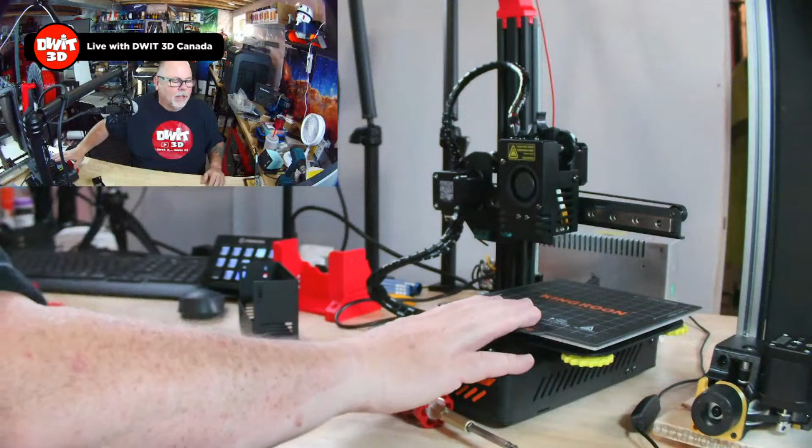That's great to see. Anybody who missed last week, we did a build last week on this guy right here, the Kingroon KP3S that was sent to me. We did a little build on this, and we did a test print of this little Viking guy, which actually turned out pretty decent.

Where's my little close-up camera here? John Cook, hello, welcome. So we did a test print on this guy. It turned out pretty good, actually, very good. I actually sped the print speed up from about 25% to 200% for the rest of it. You can see it sped up a little in quality, but otherwise it's not a bad looking print at all. So it turned out good.

So I just decided to come on tonight and do a little more quote-unquote test printing on this thing. I was just looking for a file to print. I'm looking for a specific one, but I can't find it, so I'll just download and find something.

I had mentioned 3 modifications I do to this printer. And hey, Andrew Osmond, hello, welcome. I mentioned 3 modifications I did to this printer last time I had one, which was the older version, about a year and a half ago.

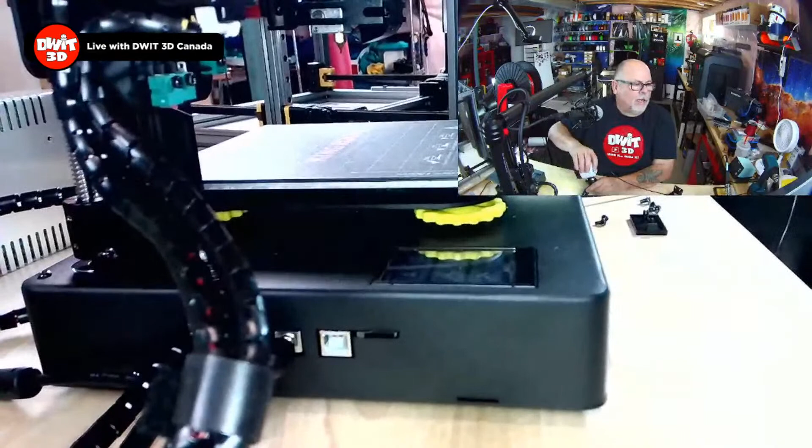One of the modifications was this little piece here that I print mainly for the SD card slot, so that when you push the SD card into the side of the printer, it doesn't inadvertently go in under the frame. But I did notice when I was going to put this on last week, let's turn the light on, get a little bit, there we go. I did notice that they have actually improved this quite a bit.

So if I take that SD card out of the slot, there's really no gap underneath or above. I can be looking up at the camera here and blindly go ahead and put that SD card in without it falling in. So that kind of made this little modification null and void. I don't need that. It would have looked kind of cute with the red highlights and everything, but I don't need it. So they've obviously fixed that and addressed that issue, unless I just fluked out and got a machine that happened to have one in place. But if there's ever one out there, there's this little modification you can use.

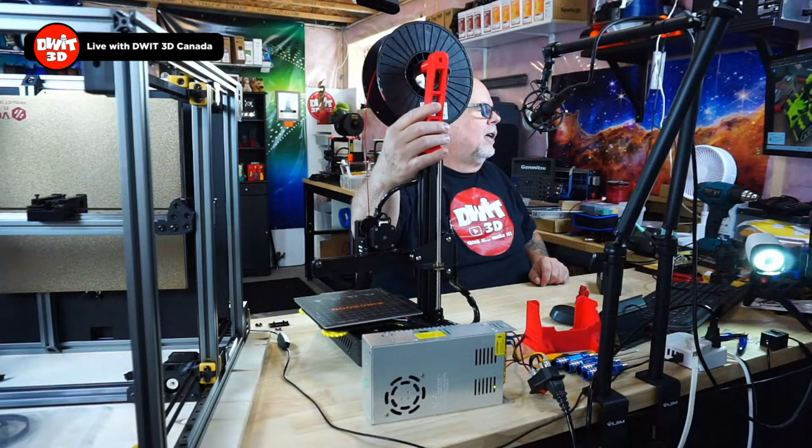The other modification I did was—if I switch to this camera, you can see from behind—I made a spool holder that basically pops on. I didn't quite clean it up enough for it to pop on, but it basically pops onto the top of that rail. It's going to be fine.

I must have hit a button, I think I'm homing. I hit the little screen and I'm homing the printer. No big deal. But yeah, the spool holder here—basically what it came with was two little wheels that you'd put there and roll your spool around, and it was just not my favorite thing. So it's a modification I found on Thingiverse.

The description's below in the video, in my previous video from last week, on where to get this. Let me just go back—I did an auto level thing here, let's just home everything and get that back to where it was. So that's the second modification, which I really like, because it gets the spool up out of the way, if you have the height. Okay, so I don't know why it's leaning on me.

I put supports in here, and I think I just didn't quite clean out some of the supports on there. Not a big deal.

As you saw in that last image, the power supply is in pieces here because I took it apart. The third modification was a power supply holder, and yes, it's broken on the front. I put the power supply in, and when I went to attach it, realized the screw holes did not line up. Whether they've changed this piece of the power supply a little bit or not, I don't know. Anyway, the screw holes didn't line up, and it was such a tight fit in there I actually had to snap it open, break the plastic to get it out. I'm going to remodel this.

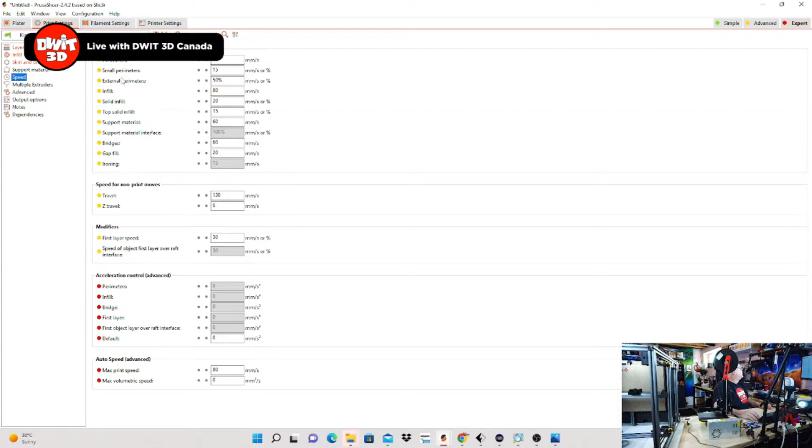That's fair enough, and I'm going to go to filament settings. We're going to go to 210 for Jesse PLA, 60 for the bed is fine, cooling is fine. Boom, boom, boom, yeah, we're good here.

Okay, just something quick to slice up here, should be an hour-long print, if that. 1 hour, 30 minutes, it'll give us time to look. It's not a speed benchy, that's for sure.

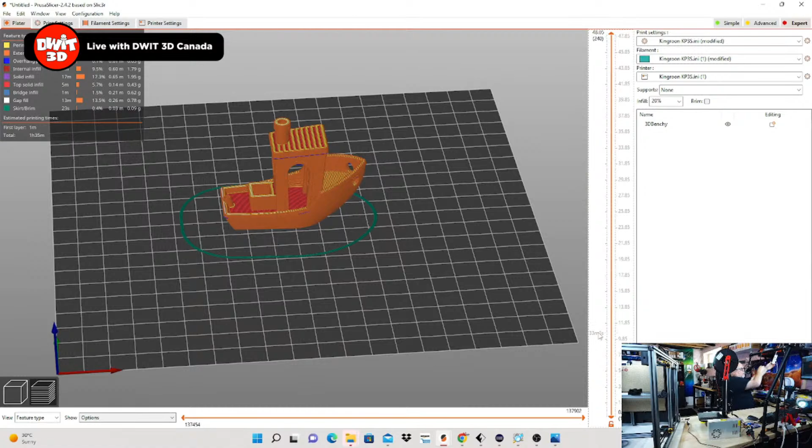Okay, let me grab the SD card out of here. And where's my micro SD? Right here, way up over here. Oh, I'll switch cameras, you guys don't want to stare at that the whole time. Micro SD port is right there.

Yeah, I know, I don't want to read you. Boom, and let's just save it to that. 3D benchy, save, and eject. There we go, okay, start this print up.

See how this does, and then I will maybe quickly model that base for the power supply.

Okay, let's go back. I haven't touched the level since last week, so everything should still be fine. The Z offset should be fine.

We're going to go printing and... not there. Benchy and confirm. Well, let's see how well this profile was made.

So we're going to do some heating up, and we'll get going. So I've got a new... where'd it go? I'm going to pop this camera off of this guy. This will be the camera we can watch that benchy print with.

And I picked myself up a new little mount here. I'm hoping it's going to make this a little better camera because it'll make it a little more versatile for where I can put it. This is a great little close-up camera, it's that document camera you see a lot of us using, but it had a terrible stand.

Let's just see, close-up cam. Oh yeah, I like that because then I can move that pretty much anywhere I want. Can I go lower? Oh, I can go down like that. Oh, this is nice. What a nice little combination this thing makes. There we go.

I like this printer, Ben. I had one that I'd since given to a friend, but I had one about 1.5 years ago, one of the first versions, and I had updated to this new hot end, the Titan style extruder, and I quite like it. This little printer does great prints.

It's $169 US for this printer, and for the price, it doesn't do bad at all. There's a higher end model where it has the power supply built in versus having a separate standalone power supply, but no, I like it, this is a great little printer. I think anybody wanting to get into the hobby, who has a couple hundred dollars to spend and isn't sure they're going to like it, should get a printer like this.

You can also get the Creality Ender 2 Pro for $10 less, but it doesn't have nearly the features that this does. Considering this one is $170 US, you have linear rails on the X and Y, direct drive Titan clone extruder - not bad - a touchscreen display. It's a small touchscreen display, but it's good. Silent stepper drivers, etc.

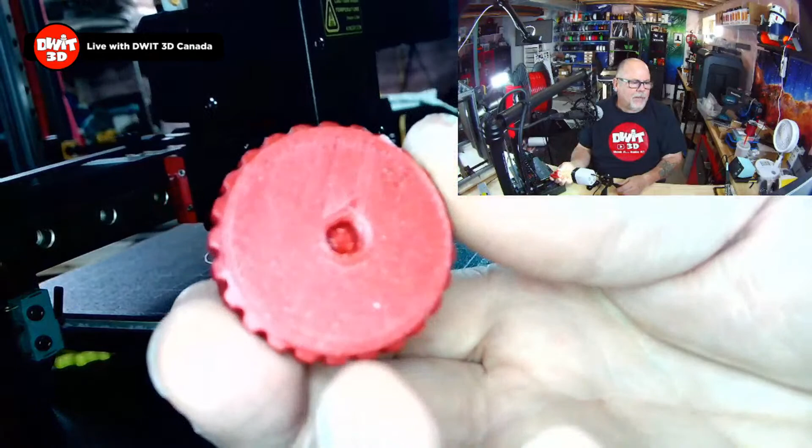So, can you install an ABL sensor onto it? I haven't looked at the board, but I think you can, though I honestly don't think you need to. It's a 180 by 180 bed. You could, I think you could, but don't quote me. I'd have to check the board first.

But I was asked the question: am I going to put an ABL or something like that on my Voron 0.1s? I said no. They're 120 millimeter by 120 millimeter bed. I don't need to.

But this one here, my experience so far has been once I level it, it's staying pretty level. I would encourage stronger springs for the leveling knobs. These aren't too bad, but that's one thing I do for all my other printers, making sure I have those strong yellow springs for the leveling knobs so they stay level. But so far with this one, I haven't had a problem.

This will be my third or fourth print on this, and I have not changed the level on the bed. The other prints were just a few quick things I did for some friends, and they're gone, but they printed well. I kept the test print from last week, and I'm going to also print.

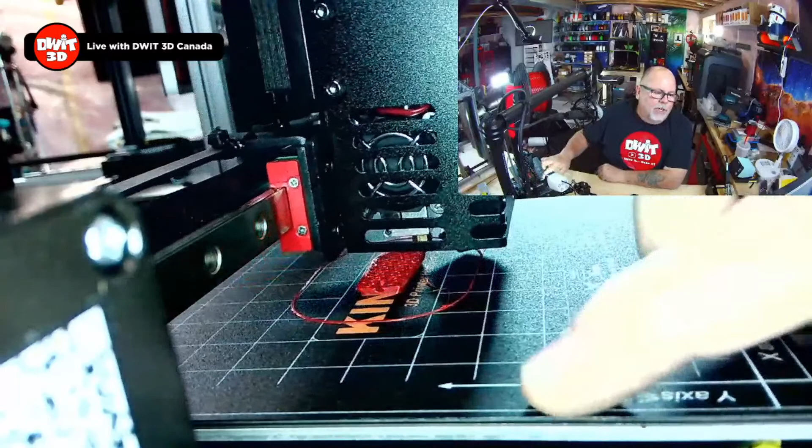But when I first got into 3D printing, and I had my Creality CR-20 Pro, it had this cheapo type flexible magnet bed on it. I didn't know what I was doing, and I jammed the nozzle into it, and it was done. These are not nearly as forgiving as a steel flex plate.

Did you feed Waylon? Oh, not yet, but I will. Okay. So... oops. Oh, I think she's listening to my stream as well. She watched me answer.

So, the other thing I'm going to fix on this printer. Paul, what I'll do is let me show you real quick. Let me get over to the other window here. The weather, we are in a heat wave here. It is hot here today. We are in a major heat wave.

Kingroon.com, you have one also. You made the spool holder, which is a must. Yes, exactly. The spool holder supplied - and I'm sorry if you're listening Kingroon, or if you watch this - it's crap. In a pinch it works, if you've got nothing better it works. But if you don't have them quite lined up straight, I've had the spool fall off it a couple times.

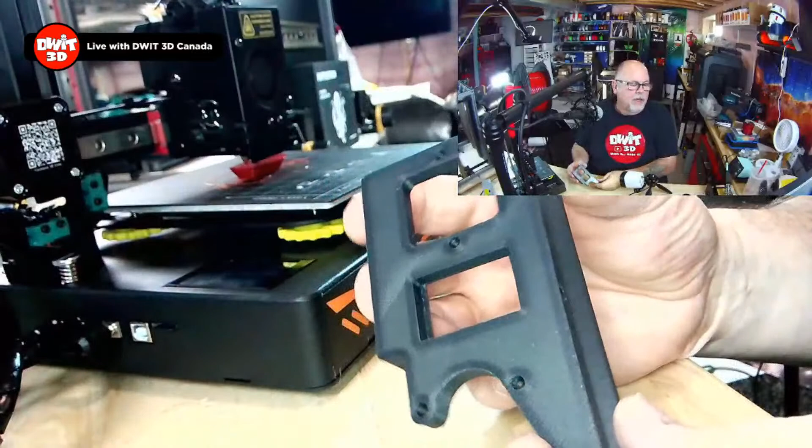This is beautiful filament. Let me just steal this camera for a minute. This is the part for the power outlet, printed in PLA carbon fiber. It's a little bit too light - I wonder if I need that light on, because yeah, there we go, that's a little better. And this was run using the new Prusa Slicer, the Alpha Prusa Slicer - 1.5, 2.5, whatever it is, the new Alpha one with that new algorithm.

That's the inside finish of the print. There's the side body for this print - I mean, that is beautiful. And this is, as I say, PLA carbon fiber from Matter 3D. If you look there, beautiful print. And then there's the bottom layer that was on the bed. This was printed on the Fokoos Odin-5, and strong - I mean, for carbon fiber, very strong.

And let's focus this again. Yeah, and this prints at a much higher temperature than standard PLA. So anyways, just wanted to show you that.

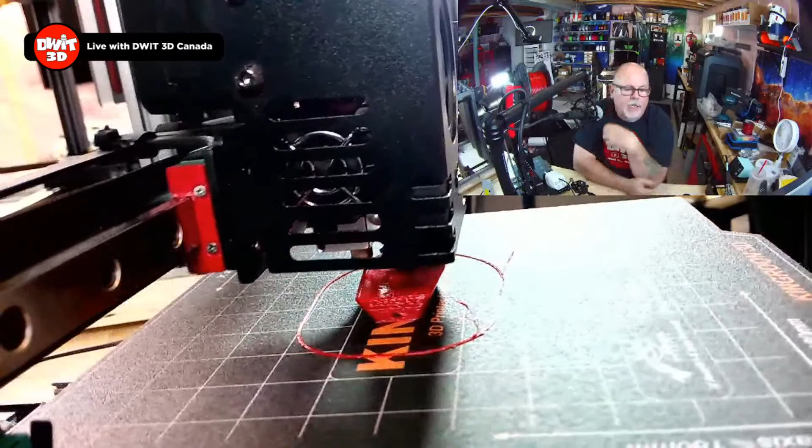When you started the benchy to print and it started to get up to temperature, were the fans very noisy until it laid down plastic? Not really, Bernie, no, not really at all, like right now.

The part cooling fan, which I'm assuming is this one, is not even running right now. And the hot end fan in here is very - let's see, that's running. Or is this a hot end fan? Why is that not running? Oh no, that's the part cooling fan, sorry, the hot end fan's inside here. Yeah, but no, not at all - there was really no negligible difference in the sound.

Yeah, that is my hot end fan right here. But my part cooling fan isn't running, which is interesting because, mind you, I didn't take that close a look at that profile that I sliced this with.

So let's see what they've got set just for fun for the fan settings on this thing - cooling. Oh, minimum 35, maximum 100. Okay, well, they got the cooling down to 35 at the minimum. Enable fan if layer print time is below 10, slow down layer print time below 5. Yeah, it's going to be variable. It's fine, it's going to work fine.

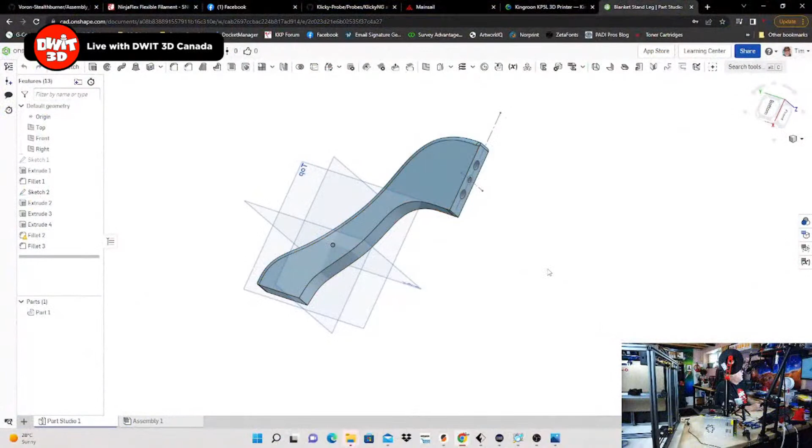It was so easy. I like their file structure in Onshape, and I like the way their tools work. There's a few things I prefer over Fusion 360. I was able to model and get my dowel holes and the screw hole that screws right through the back. Once my rat rig's up and running again, I'm going to print 4 of these legs. They won't match the wood exactly, but I can always paint them, or do them in black filament, not wood filament. I think they'll still look good because all 4 legs will match.

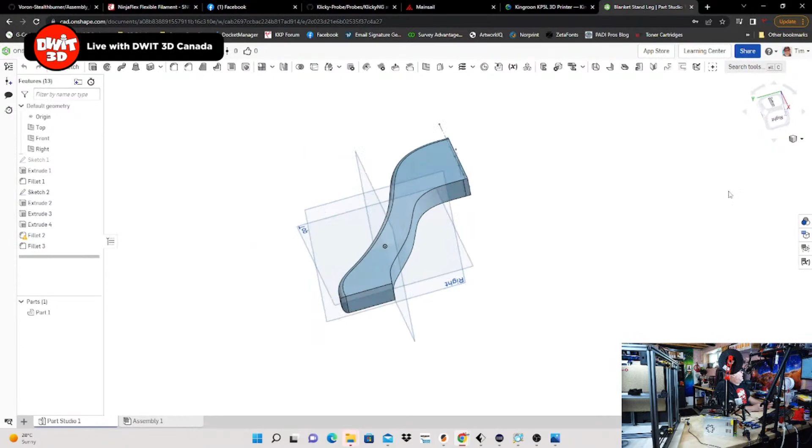I love this modeling software. It's great, very similar feel to Fusion 360. You have your timeline over here, your features, windows. It's a little different down below as far as the file structure works. You have an assembly, so if you have a whole bunch of different parts, you can bring it together in one assembly tab, et cetera. Anyways, I just thought it's great modeling software.

And it's free, you just got to sign up. It's a free account for makers, and just don't model anything you want to keep secret or don't want anybody else to have access to.

The plus about that though, is I can go on and say I wanted to model something myself, I'll go look and say okay, power supply holder, somebody might have made one similar or a different idea, and I can take that model and bring it into my Onshape, and alter it the way I need it. So that's a plus, because it's sort of a community-oriented thing. Or if there's something I'm looking for, I can look and see if it's there, and why reinvent the wheel if somebody else has done it.

Can you import a design? Good question.

Let's just see what we have here. It's all cloud-based too, just so you know. So if I go back, I'm new to this software, just so you know. I can go here, go create, import files. So if I say import from connected service or import files, it'll import any kind of file. It just says all files.

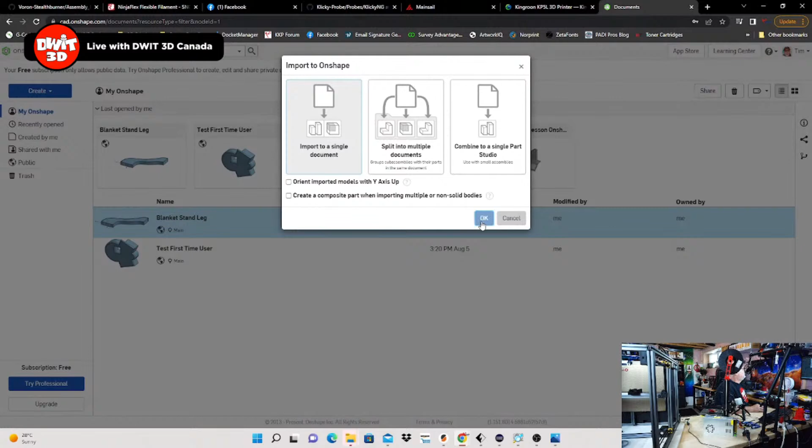Let's see if I have an STL, let's see what it does with STLs. Let's go to my desktop, I'll show you what I'm doing here. Do I have an STL? 3D Benchy, let's import a Benchy just for fun. Open, see what it does. Import to single document, split into multiple documents, combine into a single part studio. I don't know, let's use the default. And it's importing, and it imported the Benchy.

If I open it, 3MF. I don't know, what do I update? No, download, no. I don't know what it did. I don't know what I'm doing here, I really don't. Cancel, let's go back to my main window. I don't know what that did, but I downloaded something obviously. Can I delete it? Send to trash. Let's try again, let's go import, let's see if I can import a vector.

Astro Printer's logo, just for fun. Nope, so I guess it's limited as to what it can do as far as importing, but let's send that to trash. And those are some other models I've opened to look at, a couple from Teaching Tech. Oh, I did just answer it? Good, okay.

Yeah, I'm sure you can, again I don't know enough about it, I don't really do many imports. I just did this, this is nothing, I was just doing a test just to see how this all worked. Anyways, it's pretty decent software in my opinion, but as I say, the big thing to watch out for is that it is public domain, all your files. But stuff like this blanket stand leg I'm making and other little things I've created doesn't matter to me. People can take them.

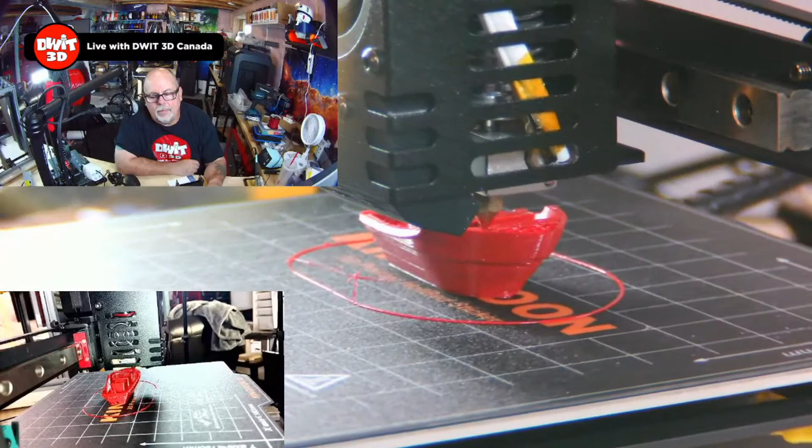Change, sorry for all the comments, but the most important part in 3D Rocks lithophane software is to change settings to negative or positive, as default is wrong. Change to opposite, that's right. Yeah, you want to have a negative image so that when you're looking at it, it looks like crap, so that when the light comes through it, the light is going to light up the dark and darken up the light. Yeah, that's one thing I do know about lithophanes, is you want to start with a negative, and then when the light hits it, it becomes a positive.

I must be printing the rubber bumper version of the benchy. I don't know what happened to the front there. I'm going to let it finish and I'm going to check it out and see. But the back looks fine, if you look at the back, looks fine. I don't know what happened to that front. There's an actual, let's see if I can, yeah, there's an actual bump there.

A bump out, so, yeah, I didn't create the profile for Prusa Slicer for this. I just downloaded the profile, imported the STL, set my temperatures and all that, and said print. So I don't know what's going on with the profile. What I really should do, to be fair to these guys, is I should load the Cura profile that came on the card with this printer and use that, and see. Let me, actually, I can't pop the card out right now, it's printing. We'll just let it finish. What the heck.

I'm going to create a document. I'm going to call this document KP5L.

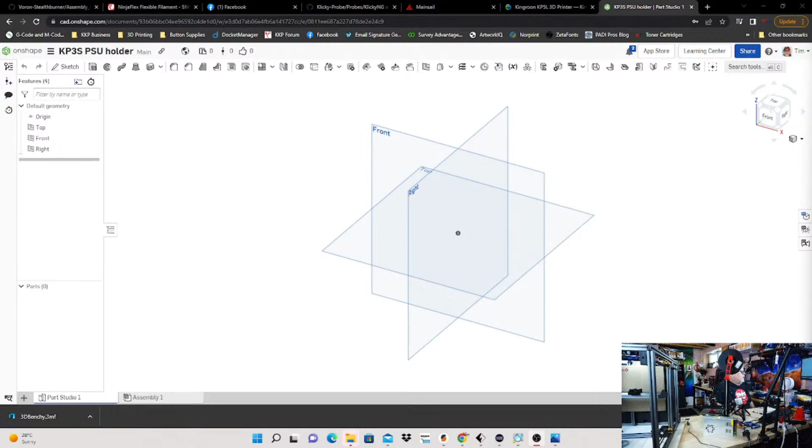If I were to go to the Onshape window, let me get rid of that... and that's the wrong camera in there anyways. So if I go like this, get rid of that, and then if I bring in this - no, wrong one, stop. Wrong video capture device. I want to bring in this one. No. It's like I don't know what I'm doing here, but I really honestly I do know what I'm doing, for the most part. I just don't remember which camera I have hooked up.

There we go, that one. Look at that bump in the Benchy. I can bring that in there, just like that. You can keep an eye on the Benchy too.

So I'm going to create a sketch. I'll do it on the top front, doesn't matter what surface I do it on. I'm going to hit N to bring that flat. The only thing I haven't been able to do in Onshape, I have to figure out if I can, is get my logo in the bottom corner. I can do that.

And in Onshape I can't use my space mouse. I haven't figured out how to use my space mouse, which I do use in Fusion 360.

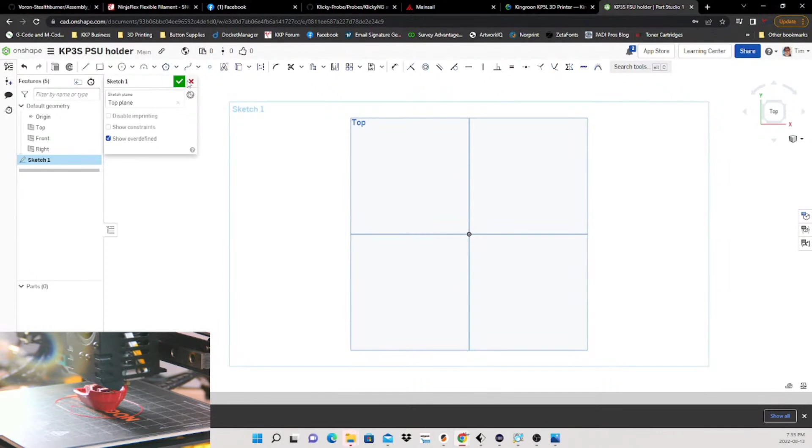Show over. Okay, there's my sketch. Oops, I don't want sketch 2, I want sketch 1, I hit the wrong one. I'm still getting used to this. I want a box, doesn't matter where. I want this to be.

Oops, get out of there. I want to dimension this box. I want this to be 90 - what did I say, 118. The other thing I like about this is that, no - 118. Oh, see, I'm frozen. There we are.

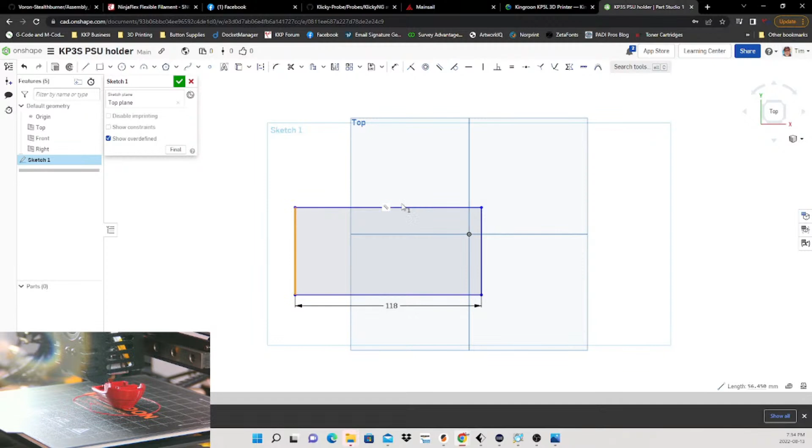With dimensioning, all I need to do is pick one side, I don't need to pick the other side as well. Or do I? Come on, it's lying to me. Stop whatever you're doing. Dimension - there we go, I want this. That's what I wanted. What was all that other crap? 52.

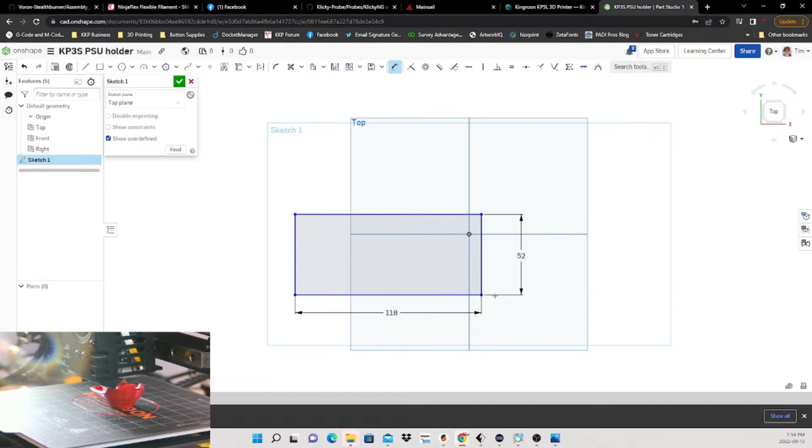There we go, there's the base, there's the bottom. And we're going to extrude that to be how tall? 82. 82 millimeters tall. So we want to extrude it. Let's get a better view here. We want it to be 82 millimeters.

That's good. Now, 82 millimeters is cool, but I don't want it to be solid, so I want to shell it. And how thick do I want my walls? I got to remember, I got to keep in mind this is going inside it, so I want my walls - I don't need them as thick as they are now.

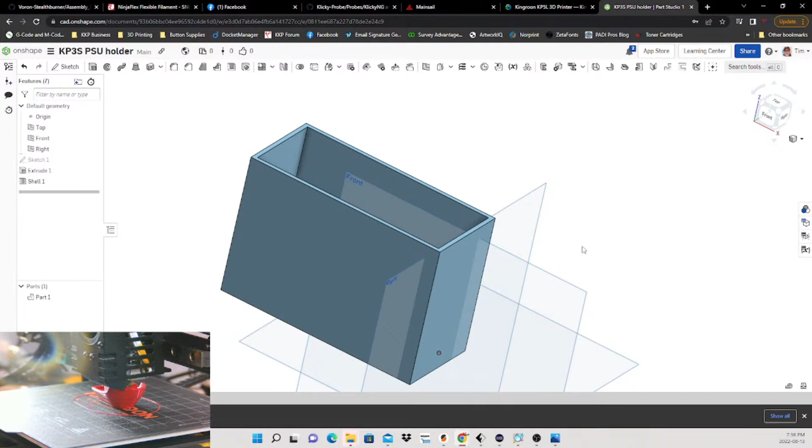So I'm going to measure the opening. I need a box that is... no, wait, let me think. I'm not designing this, I'm designing a case that this goes in. So I'm thinking, there we go, so I want this to be...

I need to do a cutout at 40 millimeters, 42 millimeters high. It doesn't have to be that big. It can be 42 millimeters high and 70 millimeters open.

42 by 70, I think I said. 42 up, and then we're going to go 70 wide. Anybody who's familiar with modeling software, I'm driving you nuts right now. I know I am. So we're going to sketch on this surface.

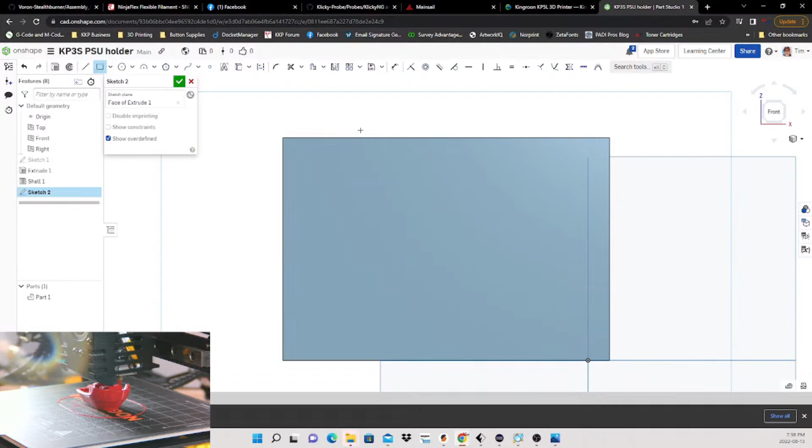Bring it to the front, and we're going to just create a box again. Although I want rounded corners, I'll figure that out after. But I want to just create a box 72 millimeters wide. So we're going to dimension that.

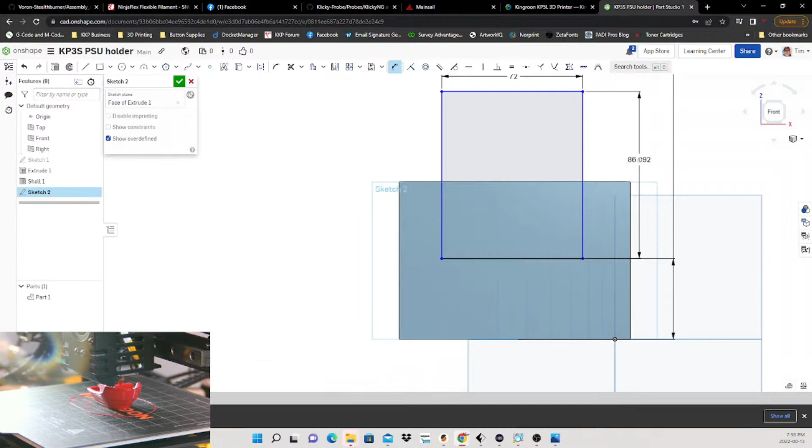72. And height-wise, I know I want the distance between there and there to be 42 millimeters. Then I just needed to cut the top of the box, so I don't really need that to be that tall. How tall is that going to be? About, let's see, probably 38 millimeters. 38 millimeters sounds good.

I want it to be right to the top. 39, 40. That works.

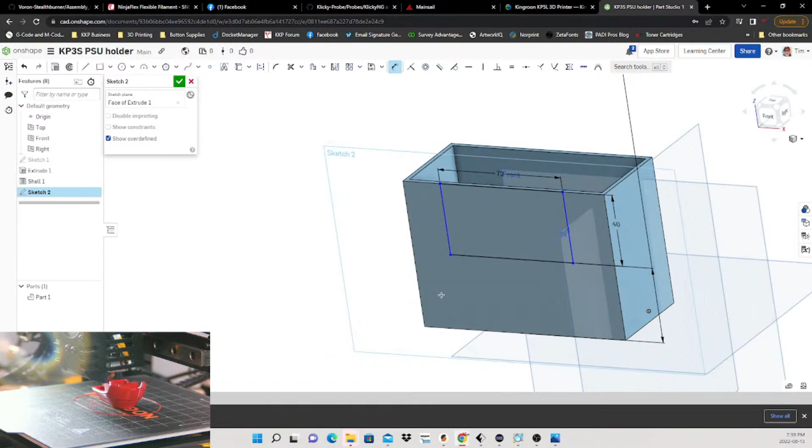I want to round that corner, and that's what I'm not sure about. I'm still fairly new to this stuff. So I want to round, but can I actually put a sketch fillet? Sketch a fillet? Really? Oh, look at that, that's cool. So if I do a radius of, let's do a radius of 11, then I can sketch a fillet over here. Radius of 11. Look at that, that's cool.

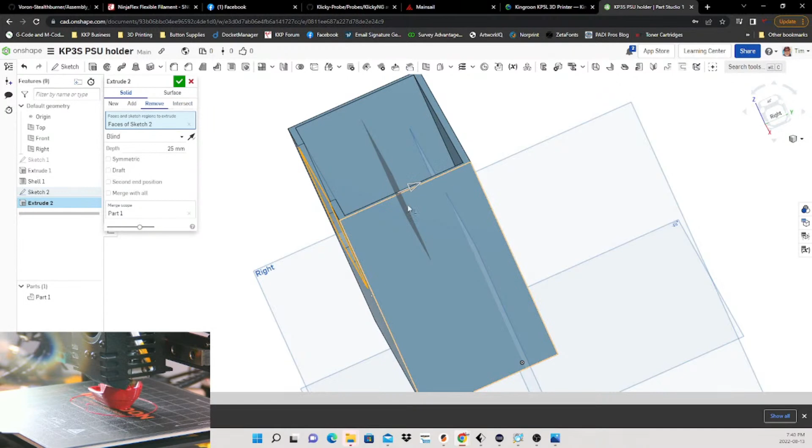Let's bring up this sketch. Let's extrude it, and we want to cut, so we want to remove, and we want to just remove to that surface. I don't know quite how to tell it to go just to that surface in this yet. If I go okay, there we go. So there, I got that cutout I need. That's perfect so far.

So that gives me that side, which is great, that's all I need for that side. I may just do a little— I've still got to put this base feet and everything in yet. So then if we go to the back side, I need my base to be a little thicker.

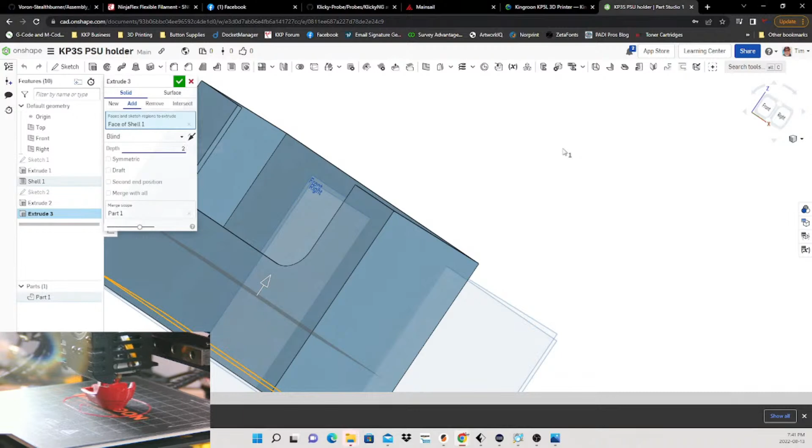Can I just extrude that one piece? I want that to be 4 millimeters. So if I extrude, yes, I can extrude just that piece. I want to add, but I only want to extrude that by another 2 millimeters, and that should make the base a total of 4 millimeters thick. Good, okay.

I really wish I could use my space mouse.

Okay, now for the back side, I want this opening to be—because this is where I've got to run that cable out through—oh look, Benchy's still got a little ways to go on the Benchy. So I want that to be 80, and we're going to come right up to the top, and we're going to come sort of a little circle-ish down, blah, blah, blah. Yeah, something like that. So 80 by...

Okay, let's see what I can do here. Sketch on this surface this time. Okay, I'm going to create a box here, we're going to make it... we're going to dimension that, and that's going to be 80. And I want the width to be—oh no, it was the width, yeah, 80 is right.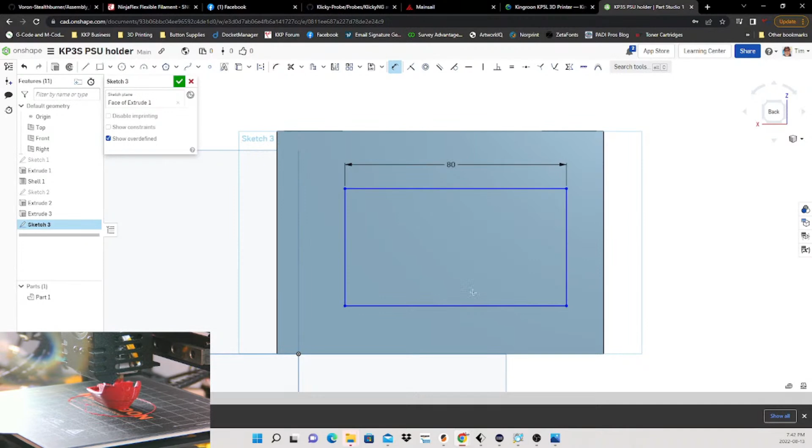I want this to be—where's my, you know what I really need here? No, I don't. I want the distance between here and here to be 4 millimeters, because that's how thick my base is, and I want that to hit my base. And I want, actually, what did I do on the other side? Did I center that somehow? No, I don't think I centered that. I think I made a mistake there. Okay, that's all right, I can go back and fix that.

Parallel—no, don't want parallel. I want coincident—no, I don't. Anyways, so if that's 80, how big is this here? Dimension cannot be created between these two items.

Allow for slight shrinking on walls. Yeah, I'm not used to doing these things live, so I'm kind of just sort of kerfuffling my way around. I don't remember how tall I made that thing. Oh, I tell you, how tall I made it at 52—okay, that's the base, the height. I extruded it, how tall did I extrude that thing to?

In Fusion 360, I can go back and check all these things. This one, I'm just not 100% sure how to go back and check how tall I extruded things to, but I can always actually just check— 118, 80. I'm getting there.

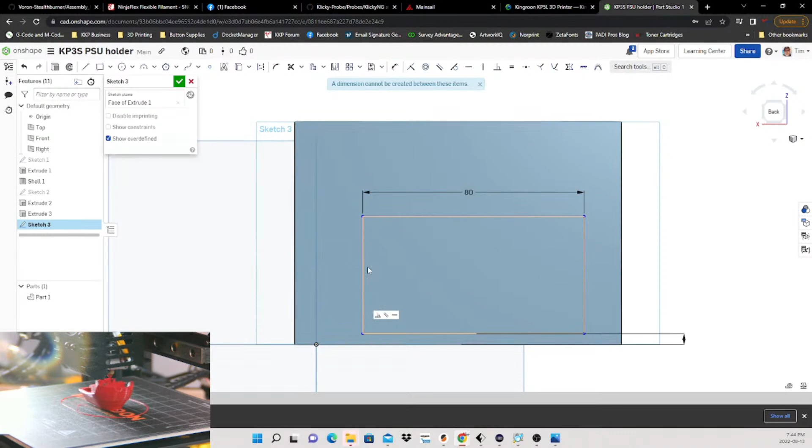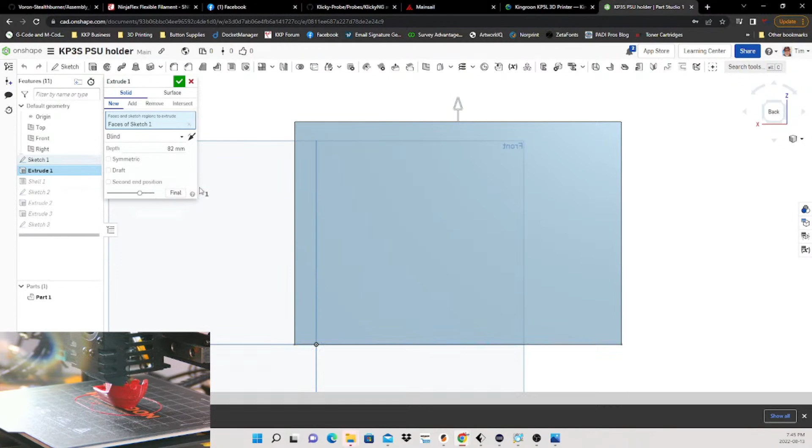Yeah, perfect. So that's what I forgot to do on the other side. And I believe if I go to my second extrude, no, that's not the one I want. It's this first one, 82 millimeters. I want to go 78. Okay, so let's get out of that.

Back into my drawing, and this one I want to extrude, or I want the height, sorry. I want this to be 78. If I'm right, yeah, that works out. 78, okay, perfect.

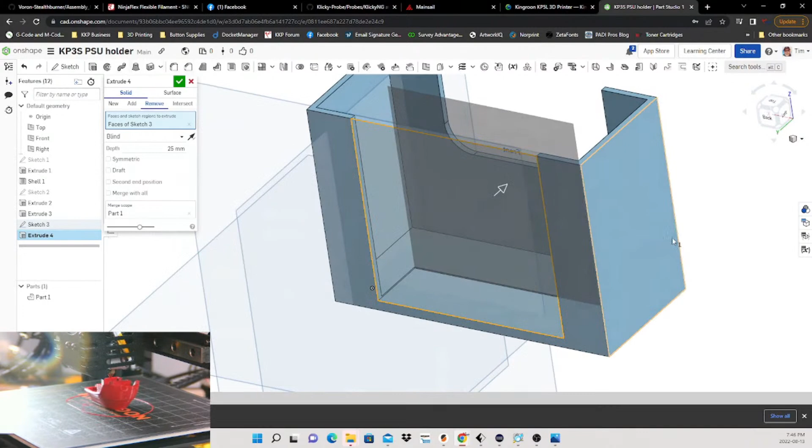Now I want to extrude that, and I want to remove, and I want to go, okay. There we are. Okay, so that's kind of what I wanted for the front. Oh, a little bit too close to the bottom. Not a big deal, I can fix that. But see, I kind of got the basic shape now of what I'm trying to do here.

That's funny that it's that close to the bottom. It looks like about 1 millimeter off. Where's that sketch? Sketch 3. It should be maybe. Where was that dimension? Right there.

Maybe that should be 5 millimeter. That should be 77. Is that right? Let's see. Is there a little lip there? No, I think that's right.

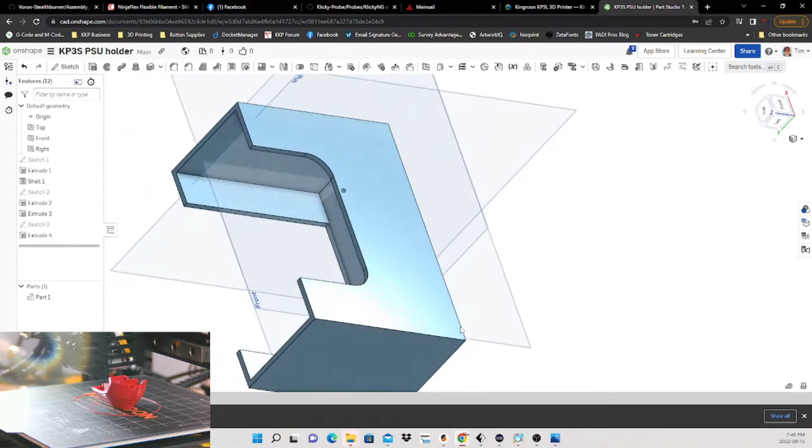I need to figure out how to do like a cross section. Oh, there is a bit of a lip there, but that's okay, because I've got to put a little bit of a zoomer thingy there. It is all part of the learning process. Like, I don't know why there's a bit of a lip there. If I have a 4 millimeter base and I put it up 4 millimeters from the bottom, but that's okay.

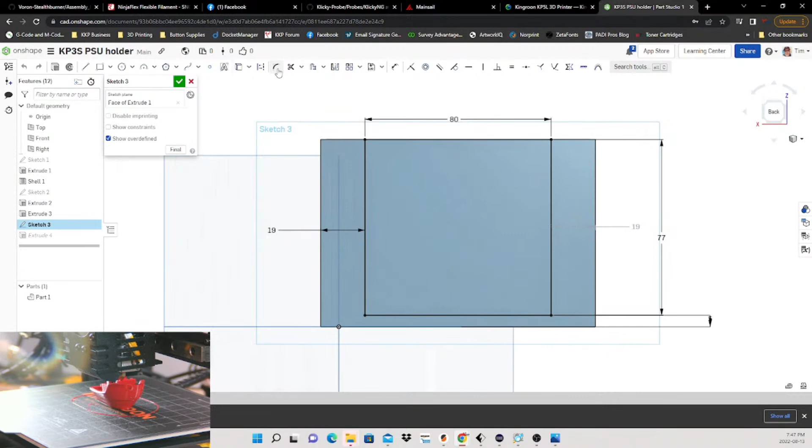I also want to go in my sketch and I want to fix, I wanted to round these two corners up here. So if I do that tool here again and go, oh no, I can't do that. Only goes that way on that one. I don't want to do that.

No, I don't want that close. Don't do that. There we go. It doesn't have to be rounded. I can actually put a little fillet there, I guess. If I do a little bit of a fillet, I always call it a fillet because it reminds me of the fish. If I fillet that little thing, yeah, I can just do a fillet of what?

Let's see. Let's say 6 millimeters. And I'll do the same over here, that one there, and then we'll just go okay. Okay, so we got a little bit of a roundness there.

I don't really need to worry about rounding it off there, it's just a cosmetic thing. So there we go, I guess I could have filleted these ones as well.

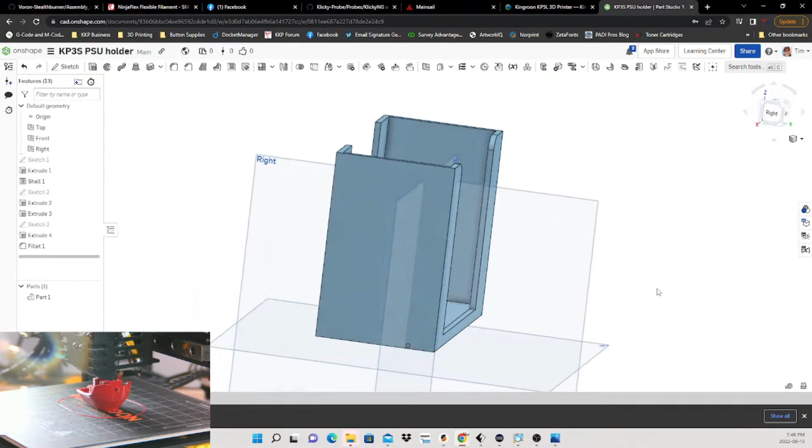So let me edit that fillet. I like the editing in this. The more I get used to it, so easy, because I can go back and select multiple corners. There we go. So we have that looking like that. So far, so good.

And the beauty of it too is I don't have to hit save. You notice I haven't hit save, it automatically saves everything I do, every time I click and make a change. Now I don't remember where it puts it, but there's a place where it... I have to go back and watch some more of the videos on it, but there's a place every click, every move I make is recorded. So it's pretty cool.

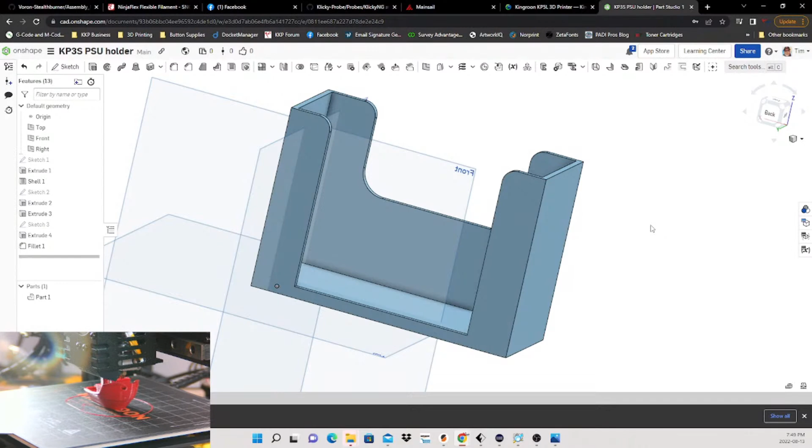So there's a start. Now for the cable, there's a little bit of a, I guess what you want to call a cutout. How thick is this base? I want to measure the base of the one that I printed because it was a perfect thickness. It was 6 millimeters thick. And it's that thick to keep that cable under the power supply.

So I think I got to change that. So that was that extrude, and I think I need to change that to 4. Let's just go 5. Make it a total of 7.

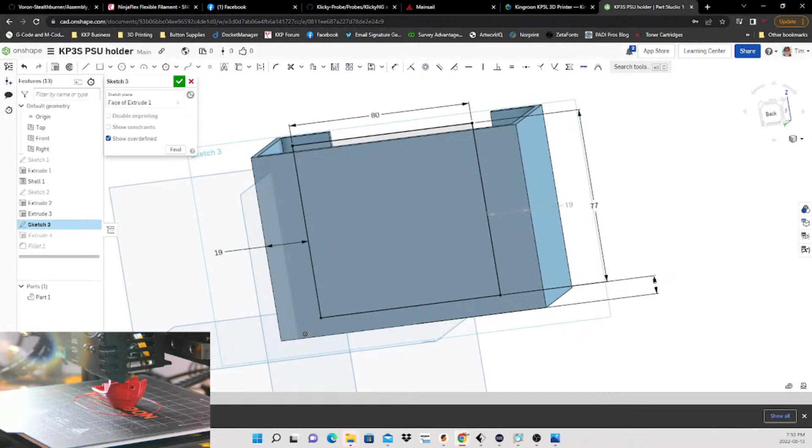Yeah, and that's going to change my other one, which is fine. So if I go back into this other sketch, and we're going to make this distance, I believe that was 80 altogether, and 74. Let's see what that does. Yeah, that's going to work.

Come on, get this in the right orientation with my, there we go. How thick is the cable?

Cable itself, we're speaking a 6mm cable.

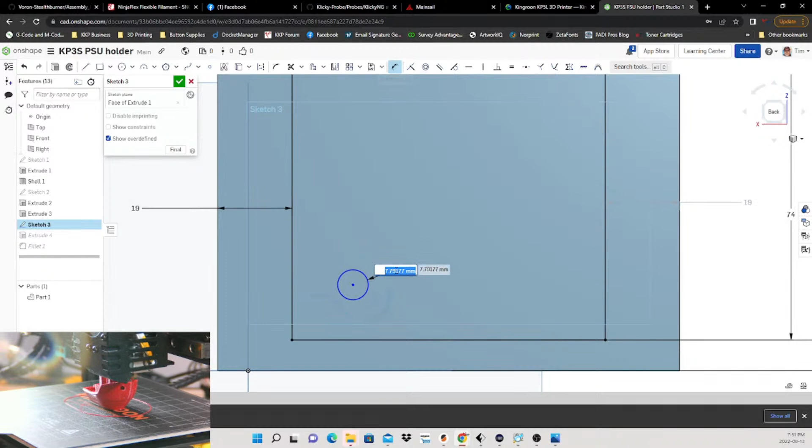So what I'm going to do is go back to that same sketch. Let's bring it straight on - I hit the N key and it brings it straight on for me. I'm going to draw a random circle, and I want to dimension the circle to 6mm to allow for the cable.

Since it's 2mm, I want a dimension from here to here, 2mm. And let's come in from here to here - call that 4mm, doesn't matter where it goes in, that's fine. Actually, 2mm is a little too low because the cable's got to sit, so we're going to go 3mm, and that'll allow the cable to snap into there.

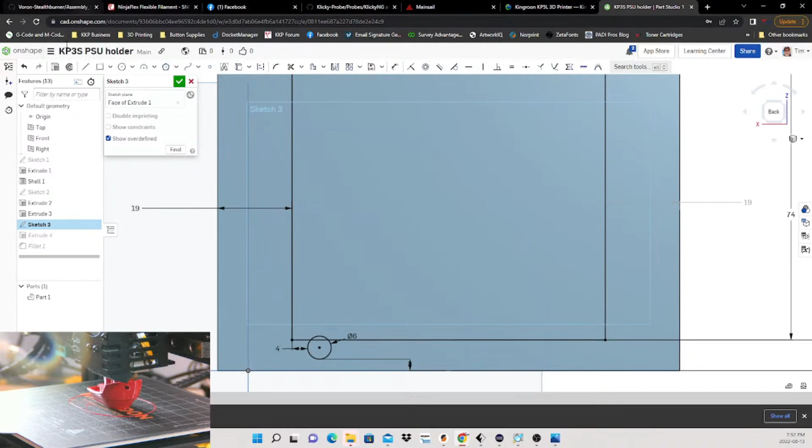That should be fine, and we're going to extrude this. Oops, wrong one - wrong button. Extrude this guy. Not you, just you. No, no, no, no, no. Not you, not you. That's what I wanted right there.

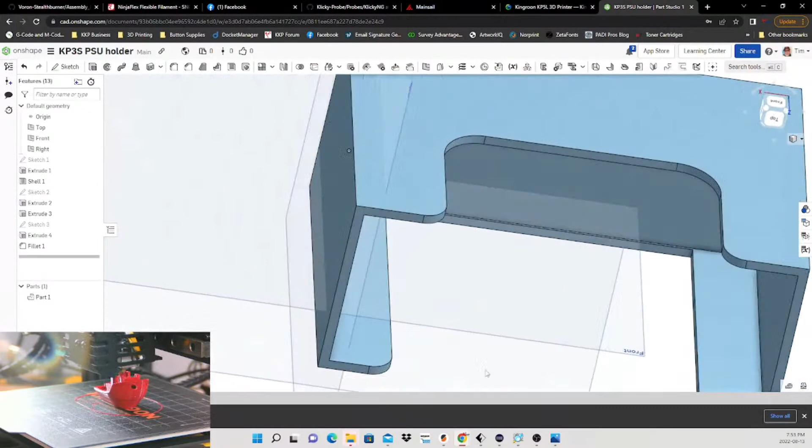So we extruded that, and that's plenty. That's where the cable in the bottom, coming out of the bottom of the power supply, is going to sit, right there - it's going to stick out the back. I may have to change that circle so it's up a little higher, but I think that'll work, although I may change that.

Let's change this extrusion here - is 1mm going to make a difference, or is it like 5.5? Yeah, that's better, it was 0.5 millimeter off for some reason. There we go.

Okay, so now we have the part for the cord to come out.

We're getting there, slowly but surely. All 6 of you, I'm appreciating you guys sticking around. Our benchies, we're just about to get on the bridging portion of the benchy here too. That's a good looking benchy, except for that little bump out. Wow.

Okay, next we need to make some holes for the screws - we'll get the feet going later. Holes for the screws, that's the issue this other one had, and they can be a little bit bigger. I mean, yeah, because the walls were too thick, which is why this didn't really work quite well.

So we're going to use this actual metal piece here. You can't even see what I'm doing, but I'm just going to use this actual metal piece here. So basically what I'm designing and modeling it after is this piece here - this is sort of what you're seeing me do here. So, yeah.

Is the cable bend going to work on hole channel? Yeah, it will. The way it comes out of the bottom of the PSU and out of this, it comes right out of here, and it just comes out a little hole in the bottom here and turns at an angle towards the front, and it'll sit in that channel just deep enough for that cable to accommodate it. It worked with this one.

This one worked good, except that the holes for tightening it were way out of whack, which is why I ended up destroying this. But yeah, that should work fine. And at worst case scenario, I can always go in and make that channel even a little bit deeper, but that should be plenty. It's back more than it needs to be.

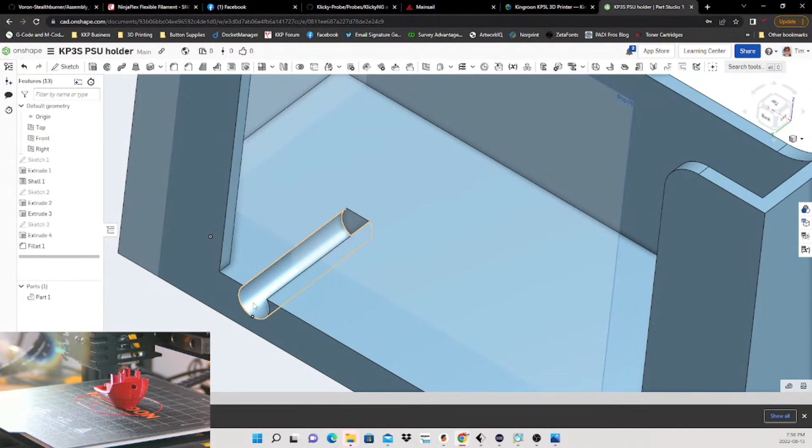And the cable should accommodate it fairly easily. I could have made that circle bigger - I mean, it doesn't matter, it's just so the cable sticks out. So really, to be even safe, which may not be a bad idea, I could even just make this circle - what is it, 6? I could make that 8 millimeter.

And actually, for the heck of it, I could make it 9 millimeter. I could bring that down - now I could bring that down to 2 millimeters, and that gives me lots of clearance and lots of depth. So as long as I have the clearance and depth for that cable, that's fine. I don't care if it sits snug or not, because the power supply is going to be sitting down on top of it, holding it in place. So I can get away with that just fine as it is right there.

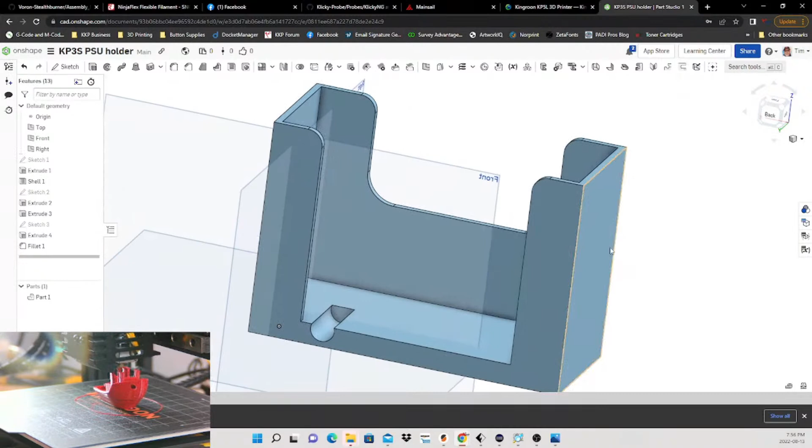Sorry about the shakiness. I'm used to using a space mouse.

So let's concentrate on the sides. I want to make sure I get this right. It's coming out this way, the left side where the cable's coming out. I got to make sure that's in the right spot as well. That cable comes out at a certain distance from the inside, so from the inside of that to the middle of the cable, it's coming out at 20 millimeters.

21 millimeters. 21 millimeters out.

One thing I didn't account for, if I go back to this sketch, this dimension is kind of irrelevant. So let me delete that dimension. It's this dimension here that's key, from here to here, 21 millimeters, to the edge of the hole. Hang on, this is measuring to the edge, not the middle. I got to measure from the middle. Let me escape that.

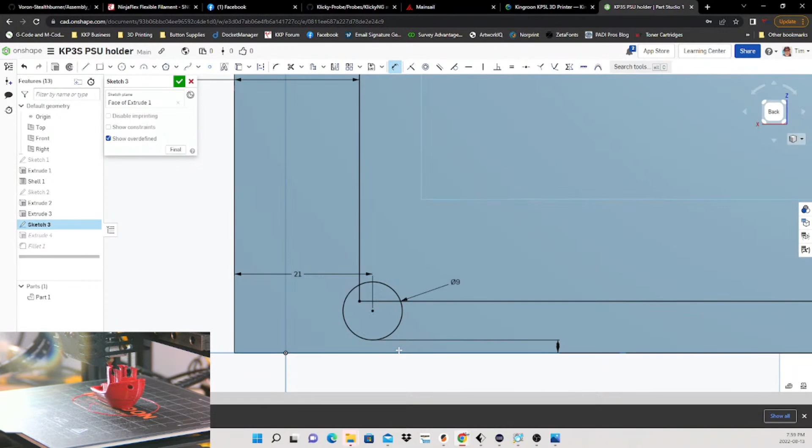Let me measure again. No, it's 22 and a half. It's more like 22 to 23. I'm going to double check this. 22, I think. The beauty of this is when I print it, I can stop the print. So I think 22 and a half is what I'm going to need here, which is pretty close still.

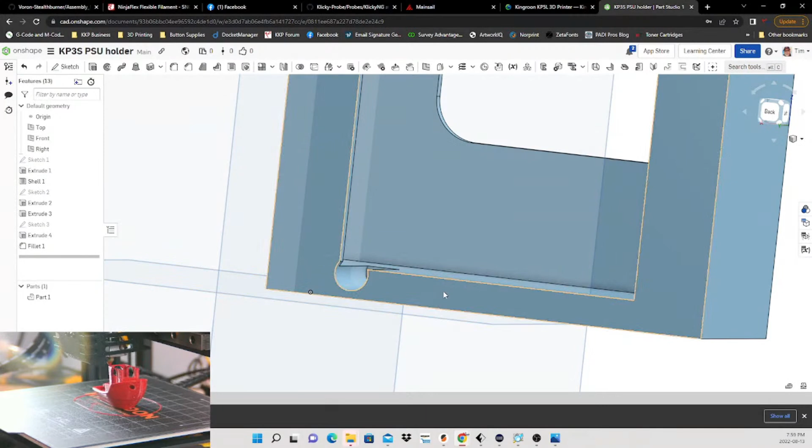But I've got lots of room in there, so all that's going to do is give me a little bit of a cutout on there, which is fine. There's no real overhang, there's no anything, that's going to be fine. Beauty of it is I can do my print right up to there, stop it, and test it. This is going to be probably 2 or 3 solid bottom, 2 or 3 solid top, and maybe 15-20% infill, so it's not like I'm going to print that all solid on the bottom either. So we should be okay there. Anyways, we'll figure that out.

Nero 3D tried printing Ultem on a Voron. Good example of what happens when you print in extreme temps. Oh, did he have a meltdown? That was tonight, right? What happened? Was he successful, or I assume from the way you worded that, Dominic, that it didn't work out, because he was printing 270 or like 300, mid 300s or something. How'd that work out? I hope he didn't kill his machine.

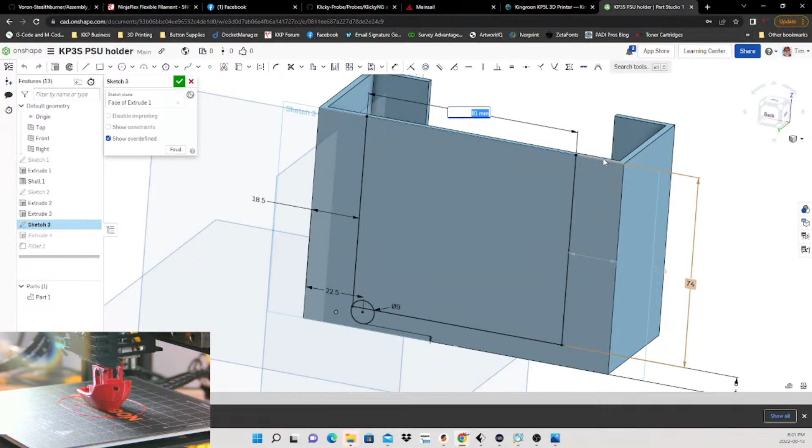There we go, I feel a little better about that right there. Just widen this, actually I'll do another. I'll widen this just another 1 millimeter, 82. And then we can make this 18. And now that should look a lot nicer. There we go, that's just a little cleaner there, straight up. There we go, perfect.

Dominic, tell me what happened. You got a first layer, okay. The hot end shroud couldn't handle the high temps, and 2 of the heat sets pulled out of the carriage. Oh gosh, well that's a crap load of heat. He had to be running, what, 350, 360, is what I believe I saw on his thumbnail that he was posting. Is he still live or is he done? Oh, he's still live.

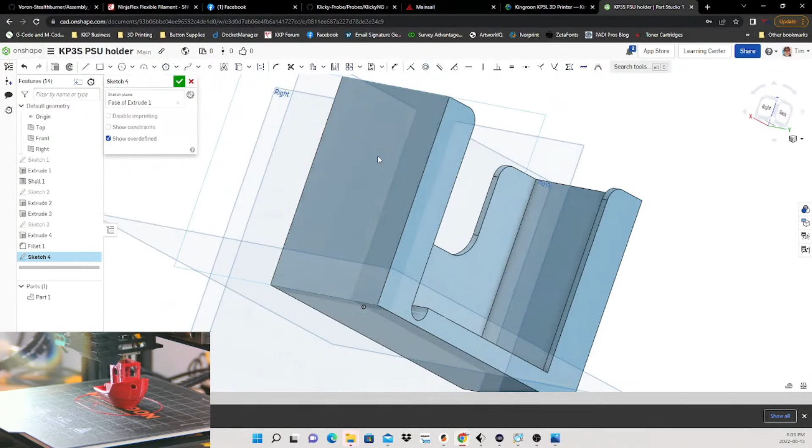41.5. Looks like. So we're going to sketch on a different surface now. We're going to sketch over here. And we are going to come up this way. And I need to have

A circle. And I want that to be... how wide do I want that circle to be? I just need to fit, I think it's an M5 or an M4 in there. So 4 millimeters. Again, if it's a bit big, I'm not going to be too concerned.

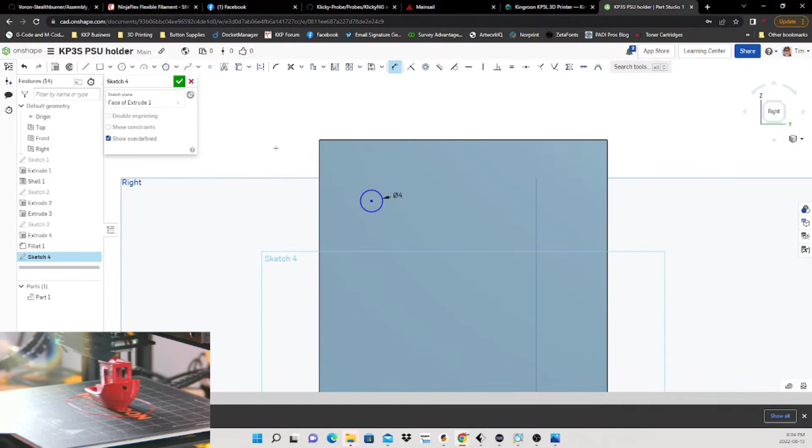And then we will do another circle to allow for the head. And that'll be 7 3/4. Just doing some measurements here. So we'll do another circle based on that one. And that'll be 7.75. Good enough, 7.7 is good enough.

And now we want them to be... Oh, Benchy's getting there. Benchy's getting there. We're on the roof.

Since these are slotted, we can pretty much go anywhere within these realms. Although we really want it to be 12 millimeters from the top to the middle. So I want this to be from here to here, 12 millimeters. And I want from the inside, and I like how those two circles lock together because I created one based on the constraints of the other.

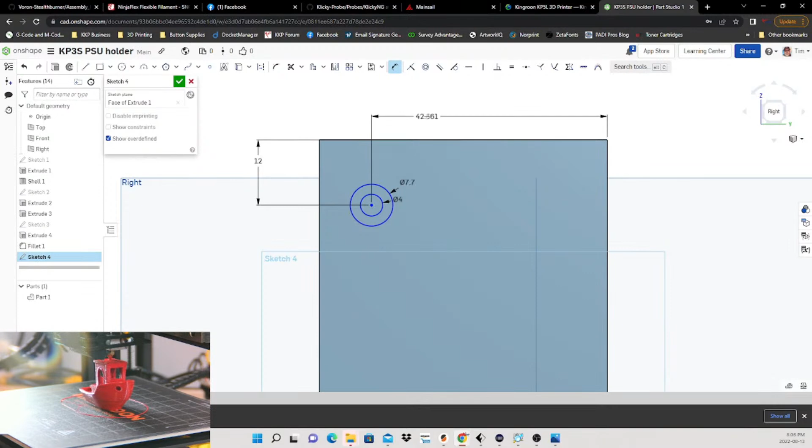And I'm going to go from this side. And I want that to be 41 millimeters in. From here to here, 41 millimeters. Okay, so that's those circles, that's fine.

So I want to extrude that one, that one. I want to remove, but I only want to remove about, so what are we, 2 millimeters thick? So about, I don't know. Let's just say, oh geez, 1.5. No, I don't want only a 0.5 millimeter thick wall. Let's go 0.75. There we go. Okay.

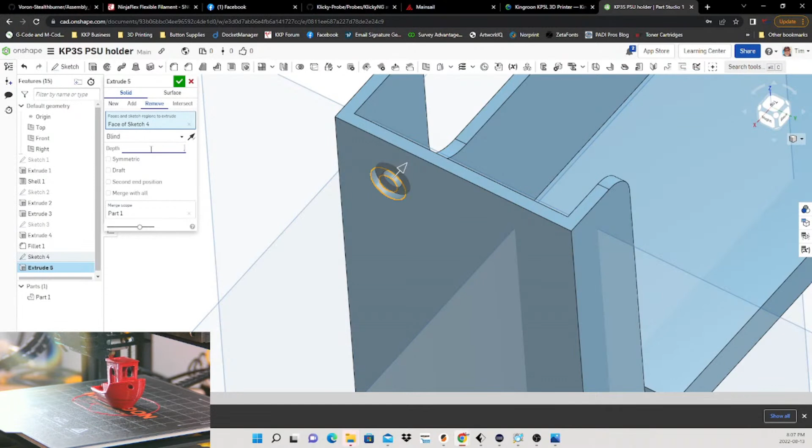There's that. And then this one, I want to extrude. No, not you. I don't want, no. How do I unselect? Get rid of you, get rid of you. You, we're going to remove you altogether. So there's the hole to go through, allowing for the head of the bolt. Sticks out a little bit, that's good.

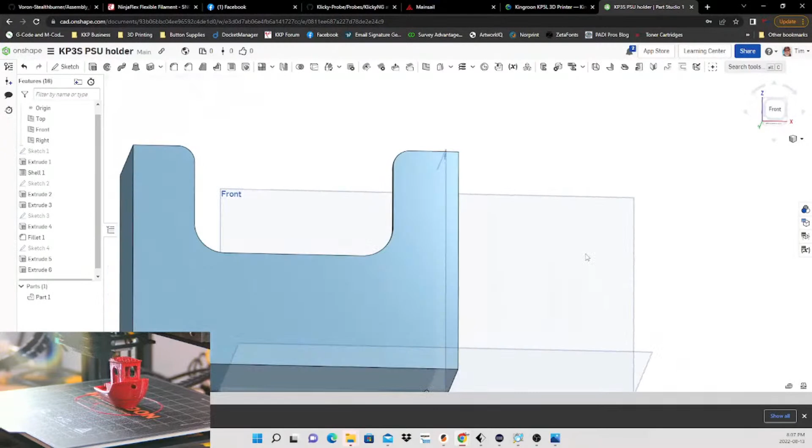Now, I wonder, because that's a mirror on the other side. So if I come around, it doesn't matter which sketch, any one of my side sketches, not that one, sketch 3 will work. If I come around here,

And I go, so what's my midpoint is 59.

Probably have worked if you had an aluminum mounting plate in the carriage. Yeah. I can see that.

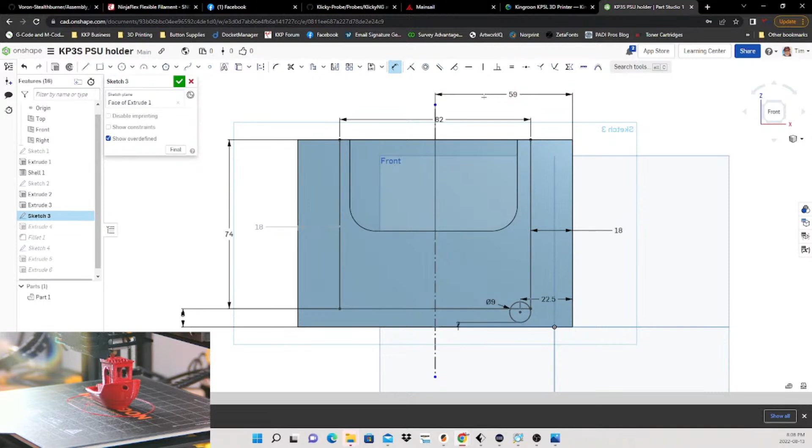So I want to create a construction line parallel, and I want to dimension from that construction line to here, and I want that to be 59. That's dead center of my model. Okay, so I have a construction line.

Let's turn that sketch on. Okay, so now I want to, this is what I haven't done in this software yet. I know how to do this in Fusion 360, but I don't know how to mirror in this one. So let's see, where would the mirror be, right there.

So we're going to mirror entities to mirror. We're going to mirror, let's zoom in. We're going to mirror that. Hang on. Part one. Part one. Part one. Is that the only entity I need to mirror?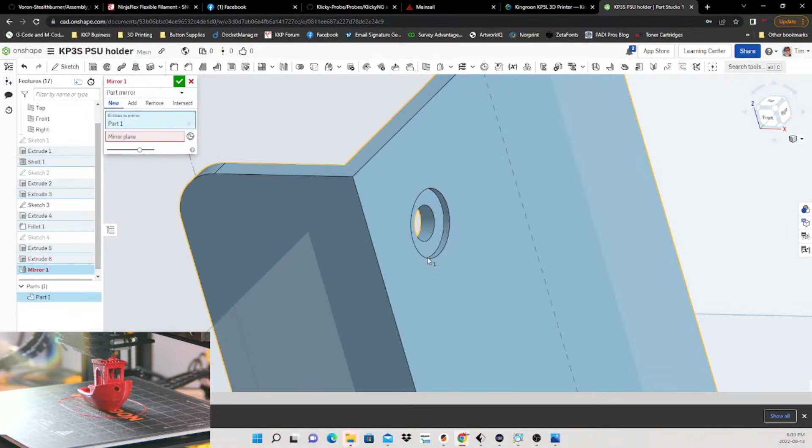Is that? Because that's going to mirror the whole thing. I could be mirroring on a sketch, but I want to try this. Okay, and let's select the mirror plane. Is that, do I need a mirror plane, or why can't I select a mirror object? Select mate connector. That.

Okay, what am I doing here? What? I don't know what I just did, but I obviously didn't do something right. Okay, that's the beauty of it is I can undo that. I got to learn how to use mirrors.

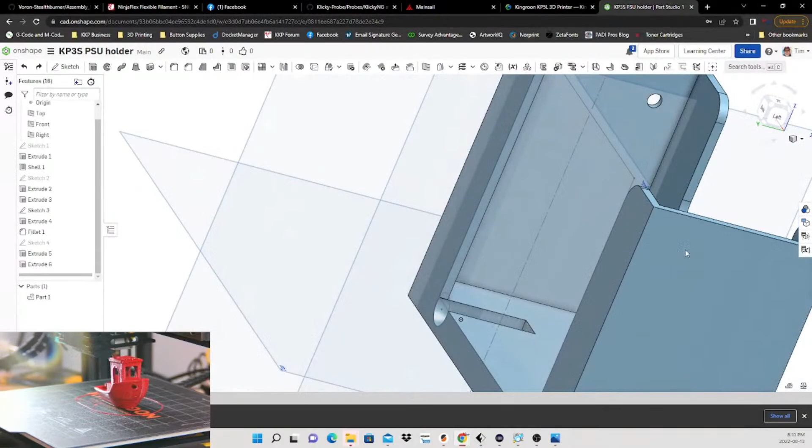Mirror plane. Can I create a plane along there? Huh. Anyways, anybody watching thinking, but the guy doesn't know what he's doing. It's because I'm new to this software. It's a little different than Fusion 360. But I should be able to mirror features.

So if I go back to mirror, mirror plane. I don't want a mirror plane. I want a mirror on that. Entities to mirror is that. No. So it's mirroring, basically it's mirroring the whole part.

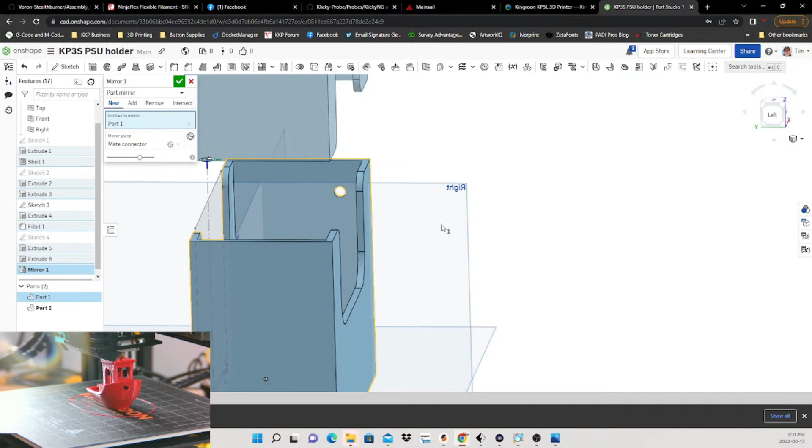Okay, that's not what I want. Entities to mirror. Part mirror. Oh, here we go. Feature mirror. Ah. Features to mirror. That. But where is it mirroring it to? Why is it mirroring it all the way up here?

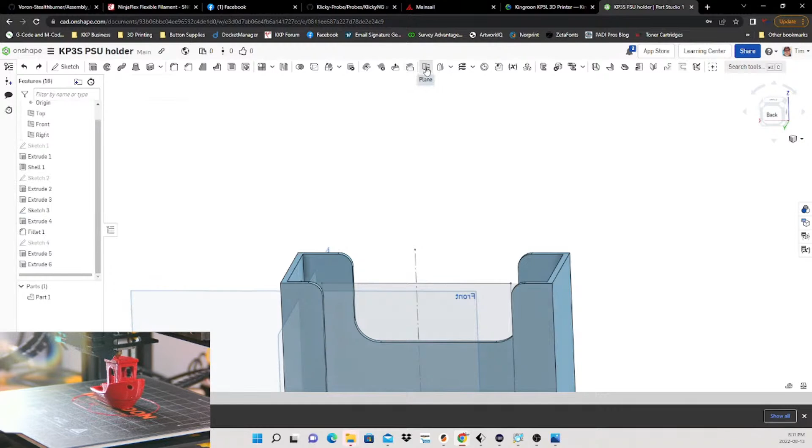Okay, I have to create a plane then along that line. Okay, so let's cancel that. Let's just create a plane. Is that a plane right here? Plane, right there. And okay. Oh no, that created a plane along that way.

How do I turn a plane? This is kind of fun. Anyways, this is how I learn, I just do trial and error. So if I undo that...

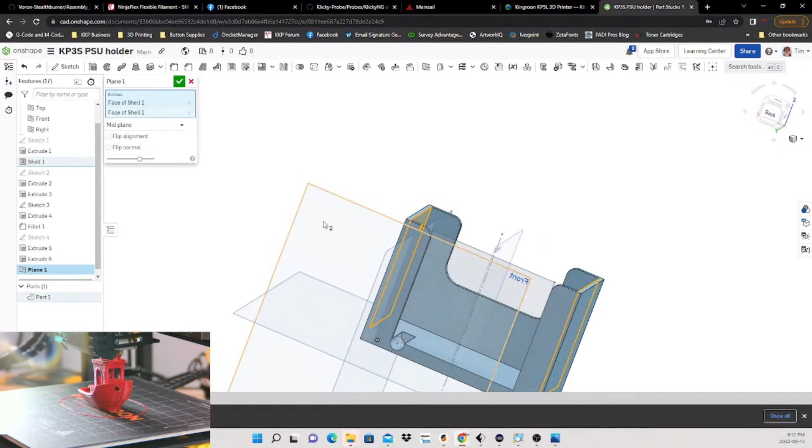Okay, I want to create a plane along this plane. 3-point, mid-plane, curve point, offset, plane point... I think it's a mid-plane. If I create between there and there, we go - that works too. Okay, so that created a mid-plane, which is kind of what I wanted to do anyways.

Okay, so if I mirror, and I mirror the features, and I come in and mirror that, and mirror that, that should be the features I need to mirror. And then I need to select my mirror plane, which is this one, right. That should work. Look at that.

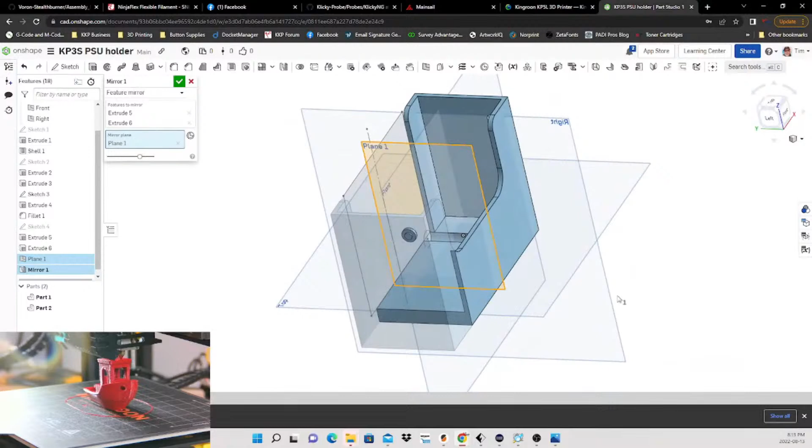I think that worked. Let's see. And go. I lost half my model. Ah! I love the undo button.

Okay, let's try this again. We want to mirror - I don't want to mirror the part, I want to mirror a feature. Now, can I select the features in this? Can I select that and that? Oh, possibly, look at that. Now the mirror plane is that, but it gets rid of the part. Why is that?

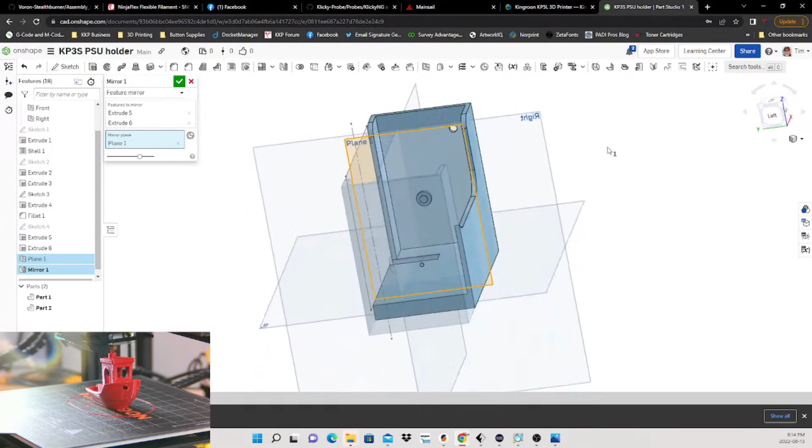You know, I could have just as easily gone on the other side and drawn it and done it the long way, but this is how I learn. It's mirroring those pieces, but it's actually doing like an opposite.

So if I say part - let's say if I say face mirror - no.

And the benchy's almost done. Oh, well, let's get back to this actually. I mean, this is all about the Kingroon, not about the part, but...

I have to figure out the mirror command on this because I should just be able to mirror this feature to this wall. So, but I may have to go and mirror the sketch instead and then just do the extrusions and everything on the sketch.

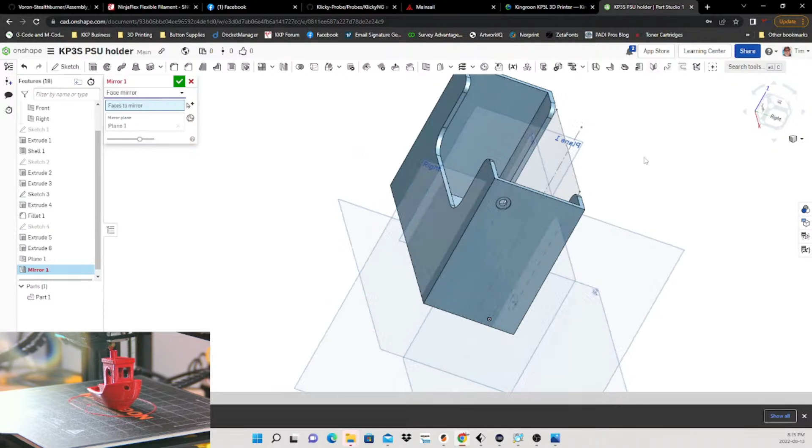This is when you would start up Onshape. Oh, there's many ways to cook a duck in this thing, so.

Here's a benchy, the last portions of the benchy. And then, yeah - oh, I'm getting tired too.

So that - the bottom left camera makes the benchy look so narrow. It's almost like the benchy is narrow, whereas the camera over here makes it look actually normal. But I'm curious why that bump happened - I'll never figure it out. But other than that bump, I think it's not a bad looking benchy.

And we'll be doing more probably next Saturday. I want to work a lot on this little Kingroon because I really believe in this little printer, so I want to kind of feature it a fair bit.

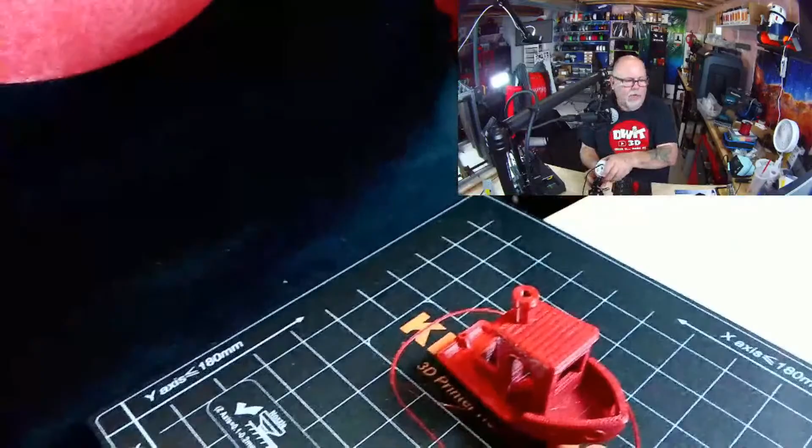And I'm going to just orient this camera a little different. Oh no, we're okay here. I just got to... there we go. And there we go - so I'm going to pull the benchy off of this little platform.

And it's not bad. Again, if you have your Z height, your Z offset set correctly and everything, you won't damage this surface. But as I say, for a beginner, I don't like this particular type of build surface because it's so easy to ram your nozzle into this, and if your Z is a little too low, you're going to damage the surface real easy. But they do offer at checkout now, you can actually opt for different build surfaces.

So here we have our... this camera's not autofocusing anymore for some reason. It doesn't like me. I could have been a bit lower on the first layer, yes.

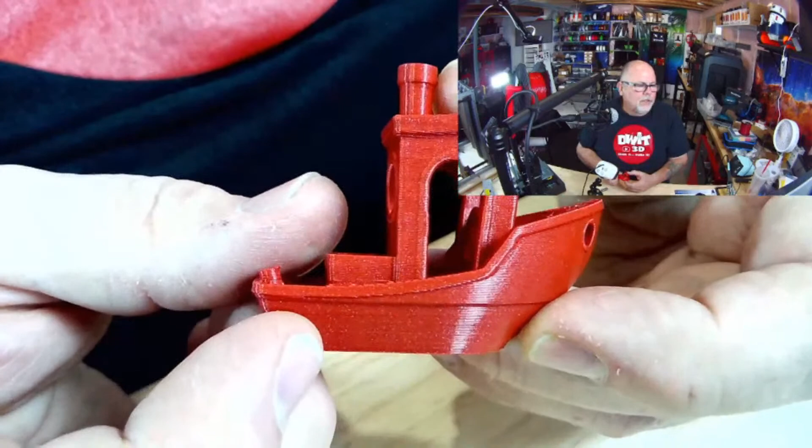But there we go. So we had a little issue, but the print looks good. If I get a little bit closer here, it's got sparkle in this filament. This is Jessie PLA Sparkle Blood Red.

The print looks good, except something happened halfway up the print here. You can see there's a little edge that shouldn't be there, all the way around on that layer. I don't even consider it a layer shift, because a layer shift wouldn't have that same ledge all the way around — it would have just shifted it over, you know what I mean. So that's not a layer shift, that's something in the file or something, because otherwise that's really, really good looking benchy.

So let's look at the overhangs. Can't really see inside too well unless I turn the light on. Look at the roof there — the bridging looks pretty good if you can see inside. The top of that roof looks decent. Smokestack is decent. And the bridging across the windows.

Okay, and if we look at the bow, or port, or the front — this is the bow. No, this is the stern. No, this, I don't know. If we look at the front, overhangs looking good.